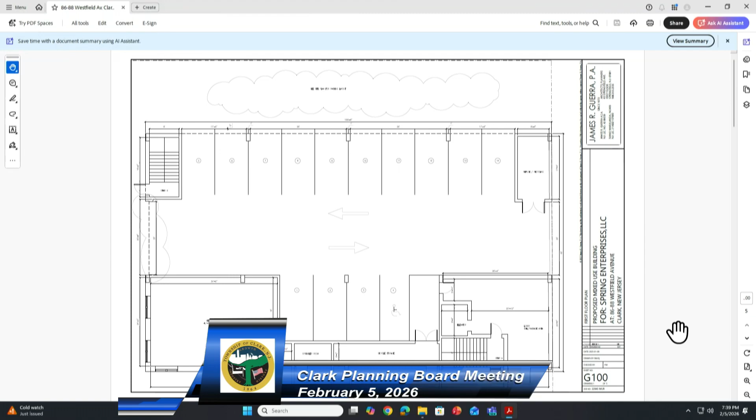I'll start showing the submitted plans that you have. This is sheet G100, dated January 16, 2026. This is the version that was submitted to the board. That is correct, yes.

In this sheet, we're showing the first floor. Westfield is at the bottom of the page, Fulton is at the left. One of the items mentioned was the setback variance we have towards Fulton, on the left side. As noted earlier, our only neighbor is the American Legion, so there's no residential next to us, and directly across from our front is the gas station. That setback actually allows us to provide a better parking layout with up to 3 cars by taking the small area into the setback.

On the floor plan, lower left, you'll see the 850 square foot proposed commercial space. Next to it is a sprinkler room; the building will be fully sprinklered. Next to that is storage for bicycles, and to the right is the lobby with access to the elevator and one of the stairs. Further up on the drawing to the left is the second stair, which exits directly towards Fulton, and to the right is the refuse and recycling room.

Again, this room is within the building. It has full walls, and the walls facing outside are the same material and colors as the rest of the elevation.

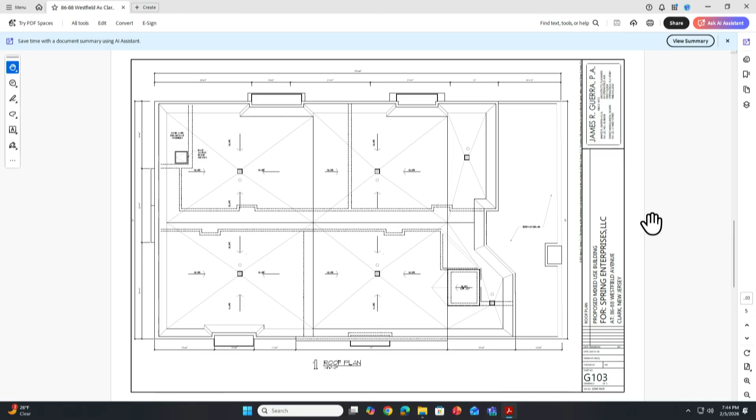Sheet G103 is just the roof plan. I don't have anything more to add on that.

So the next one will be an exhibit. We revised the rendering based on conversations we had with the planner and engineer. We request, once it's in, to be marked as A1 with today's date.

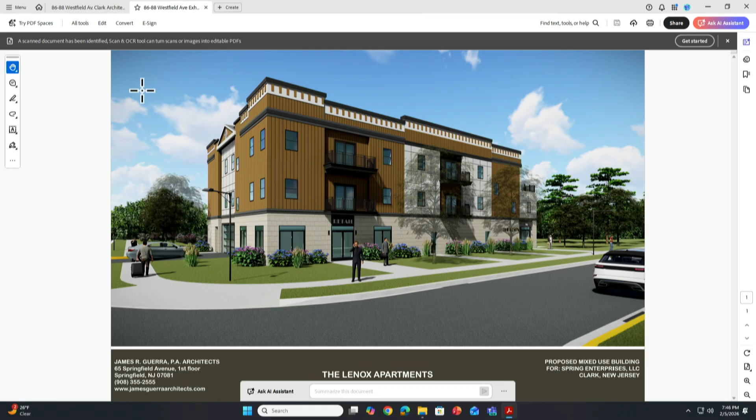On this rendering view, we're at the corner of Westfield, which will be toward the right, and Fulton toward the left. There is really no architectural style that is uniform around the area. The owner of this building also previously built another building, 60 Westfield Avenue, just 2 blocks away, so we're keeping within the same architectural style of that building too, making for uniformity when driving along Westfield.

I know there's an interest in colonial elements. We do have that rectangular massing that usual colonial architecture has, large rectangular windows, and on the left side we're using a gable roof, which is typical for that type of architecture.

On the first floor, we're using integral color masonry units, which is a recommended material for this area. Then on the second, third floor and parapet, we're using fiber cement panels. These are not fiber cement panels meant to look like masonry, which I think is what's not permitted. So these are fiber cement panels, but some have vertical slats, or seem like vertical slats, and others are just larger panels.

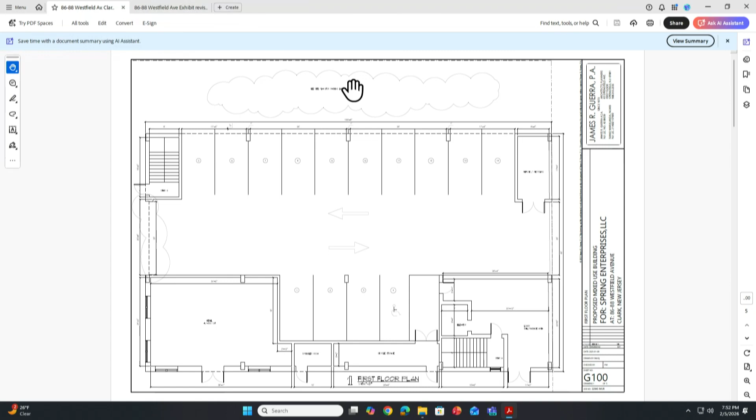How many businesses are going to be in the business area on the first floor? The first floor is businesses, correct? There is a small 850 square foot commercial space. So it's just one business? One, correct. And parking for the business piece, street parking? Parking is included here for business, correct?

You indicated that you're 2 feet short on the opening for clear two-way traffic. Your justification is it's a small parking lot, doesn't seem to be very solid. Is there any other justification you could give us? Well, we're providing the 22 aisle, it's just for the door, and I just need some area so that the mechanism of the door I can put next to the rails. It's just for the space of the door so it can work. I can't find a door that can go all the way to the edge. So it's for the mechanism of the door.

Mr. Chairman, our engineer will touch on that in more detail for ingress and egress. We also have 2 letters from our planner and engineer. Will somebody be going through them? The engineer? Yes, although we think we've addressed everything, and again, it's great how we do it here with having our conferences, our technical review committee meetings, and development ahead of time.

Why don't you have an entrance in the parking lot for the commercial space? It's a very small commercial space, and to make sure we have enough parking for everybody, we're using the lobby for that purpose. Anybody coming from the commercial space will not be able to go into the elevator or stairs, as they will need a special fob to go into those spaces. And when the commercial space is closed, that garage door is closed, and only the tenants will be able to access it.

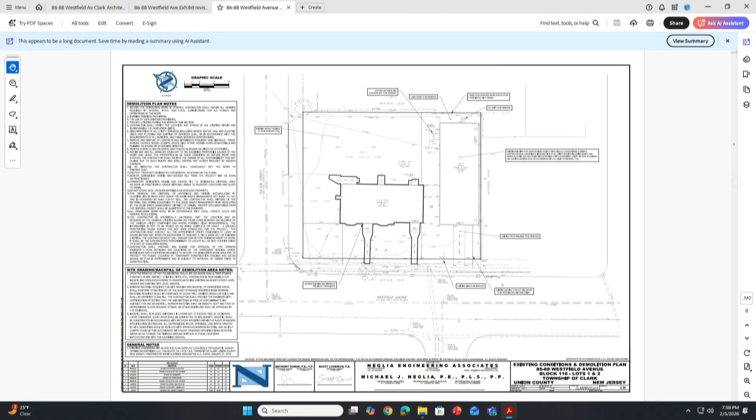The next sheet is site plan sheet 3.00. I'll begin with the setbacks to the building itself. Along Westfield Avenue, we propose a 15-foot front yard setback, where 15 feet is required. To Fulton Street, we have a 10-foot front yard setback, where 15 feet is required. To the rear, we provide a 20-foot setback, where 20 feet is required. And to the adjacent property to our southeast, we have a 0 setback, where 0 is required.

Moving to access, the site will be serviced by a newly proposed full-service driveway along Fulton Street. It will have a width of 22 feet, leading to a garage door 20 feet in width. As previously heard, the garage door will be motion-sensored during the active business hours of the retail use, and afterwards it will be security access via a mechanism for the private residents.

As we move interior to the building, it provides a 22-foot wide drive aisle to access the parking spaces. In my opinion, 22 feet is basically the minimum needed for safe circulation, so this is wide enough to safely circulate the site. Neglia, and I myself, have done sites with similar buildings and similar parking layouts before, a number of them in Elizabeth and Union County, without any issues brought to us.

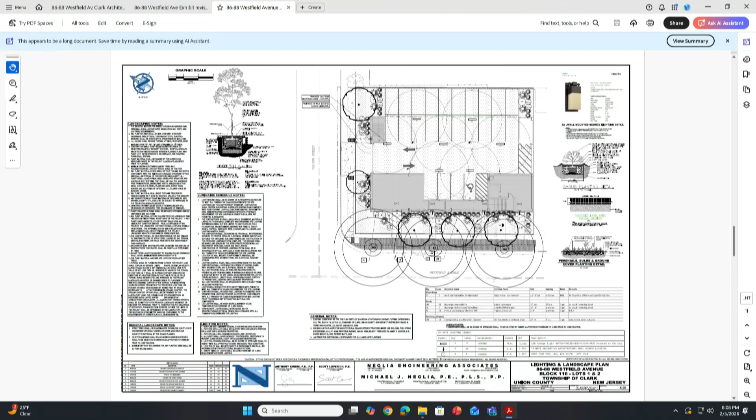That concludes testimony. And again, as the chair mentioned before, no issues with the review letters from either the planner, Mr. Ricky, or Richard O'Connor, the board engineer, and you'll work with Mr. O'Connor on that updated stormwater system. Correct, we have no issues complying with any of the outstanding comments of both of those letters. Great, thank you. Mr. Chairman, no further questions of Mr. Loverich at this time?

Yes, there's 2 catch basins directly connected to this system. There's actually several access points. You can see here there's 3 rows of pipe. Towards the end of the drive aisle, we have a manhole on each corner, and 2 in the center. They're hard to see, the catch basins, but they're basically open-grate catch basins in the middle of the system that dump into it. So there's access from those 2 points.

The little rectangle you see on the site over the basin is what we call an outlet control structure, which is the mechanism we use to reduce the flow rate. It has a lid that you can access for maintenance. The basin itself is pitched very slightly at 0.2% to help, like a self-cleaning mechanism from back to front, so any grit that accumulates over time naturally flushes itself. We also provided a maintenance manual for this, which will get filed with the deed of the project to provide yearly maintenance.

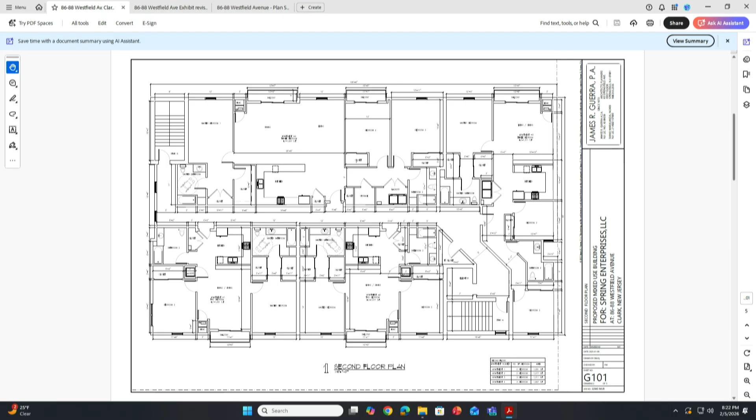And the open-air parking in the rear, there was some discussion about a small wall. Will there be fencing or other shielding on top of that, or could kids just jump over that wall into the parking? It's a 4.5 foot wall that will shield the headlights, and then we'll top it off with 1.5 feet of metal fencing, so you get to 6 feet total. Okay, thank you for that clarification.

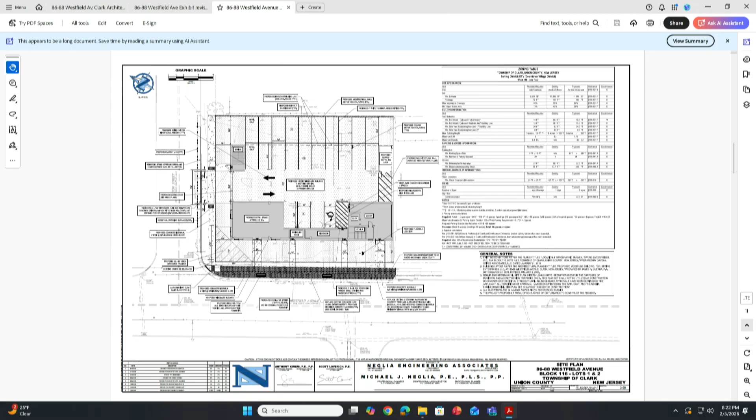Scott, could you just introduce the location of the 4 EV spaces and explain the credit to the board? Yes, I'm just circulating back to the site plan sheet. So the state statute requires that we provide 15% of the calculated required parking supply as make-ready EVSE parking stations. We are providing them along the Westfield side, towards the bottom of the page, next to the handicap parking space. Those 4 spaces will all be make-ready EV spaces, in compliance with the state statute requiring us to provide 4. We provide the 4.

With providing the 4, we get up to a 10% credit against the parking calculation. So when you do the math of what the required parking is for the site per your ordinances, it's 22 parking spaces. When you provide EV parking spaces per the state statute, you're allowed to reduce that number up to 10%, or essentially EV parking spaces count double towards your requirement. So it's easier to interpret as reducing the required parking, in our case, by 2 spaces to 20, where we provide 24 physical parking spaces.

Thank you for the clarification. Anyone else on the board have any questions or comments? Thank you, Lance. The tandem spots, that's all inside the building, not from the outside? No, a portion of it is open to the sky.

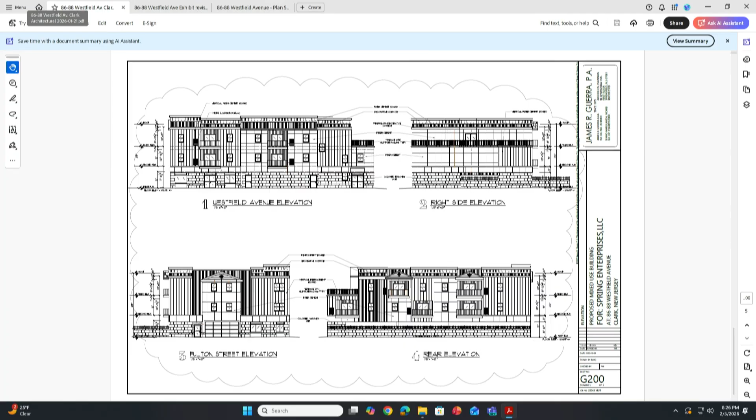And to address that comment - a great comment, especially with the winter we've had - we have no problem incorporating into the developer's agreement that after a snowfall, the property ownership will need to remove that and make sure those spaces are accessible, because I don't think you're going to push it up inside there.

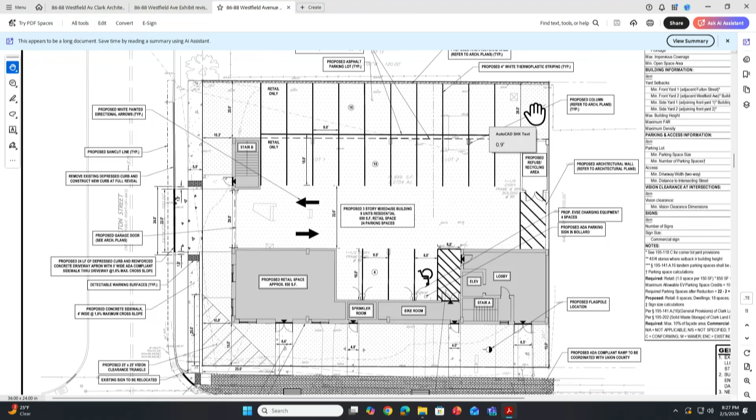Has any preliminary inquiries or discussions about what might come into the commercial area been made yet? We've kicked it around, and probably obviously that small area is something that's fitting, whether it be a small business or coffee shop, retail.

Compete with the coffee shop in your other building? Any other questions on the board? Yeah, I have one. You have a retail space inside the building. How will is that for the customers or is that for the employees? We have for both. We have parking for the employees and customers.

So you have a garage door, though. How will they be able to access that? So when the business is open, the garage will open as a motion sensor. As you approach it, it will open and you'll be able to park. When the business is closed, it will no longer do that. You would have to have the mechanism to open it for only the tenants.

So anyone can just drive in and go into these spots? During operating hours, yes, correct. And into the building? Correct. Okay, thank you. Thank you, Gary.

I got a question. Excuse me, so how are these garage doors going to be controlled after the commercial spot is closed? And if no one is in that commercial spot, will that door just stay closed until there's someone occupying that space? Correct. And then who controls after hours that door? Is it by? It will have to be programmed for the hours. Okay. Yeah. Okay. Thank you.